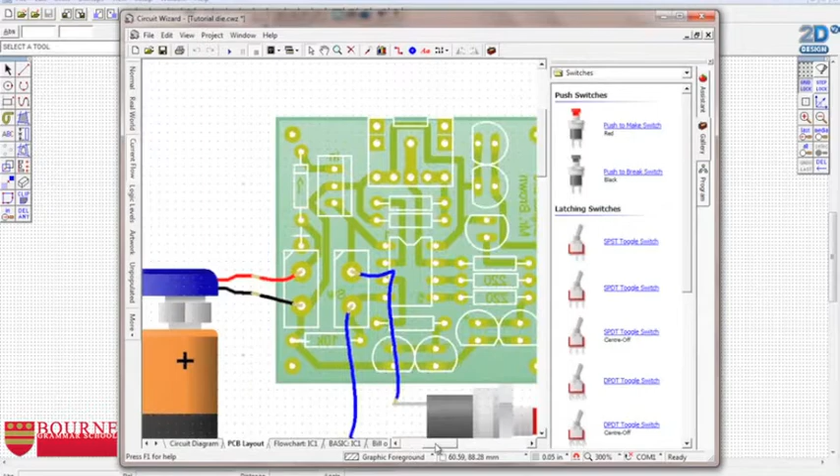Now, the PCB you've been working on in the tutorial looks a whole lot like this one just here. There it is. I'll show you how to do it for this one, and then I'll look at the actual one that I've created. That is the one you're actually building, which is very similar, but just fractionally different.

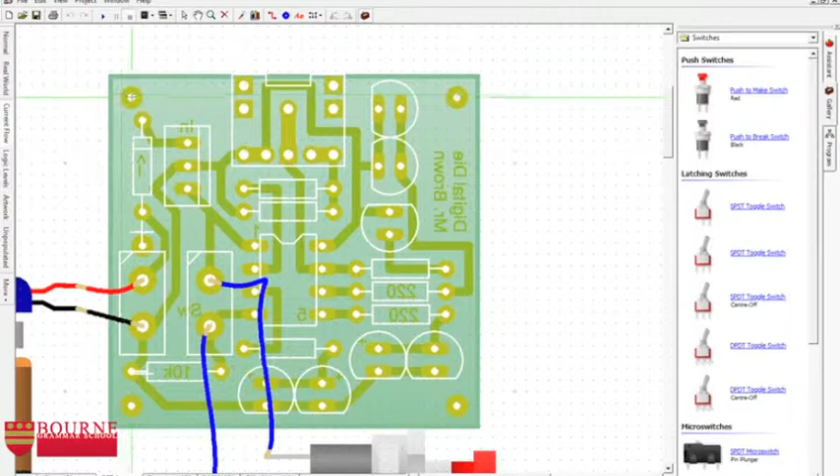There isn't a very good measuring tool built into Circuit Wizard, but what you can do is go Project, then PCB Components and Circuit Board, and you can draw a circuit board. Make sure you turn the grid lock back on, snap to grid. You can draw a shape from the center of that particular piece of the board down to the center of this pad down here. This isn't actually snapping on very well. It should snap on perfectly, but that's approximately in the same position for each one of these pads, so it'll still work effectively the same.

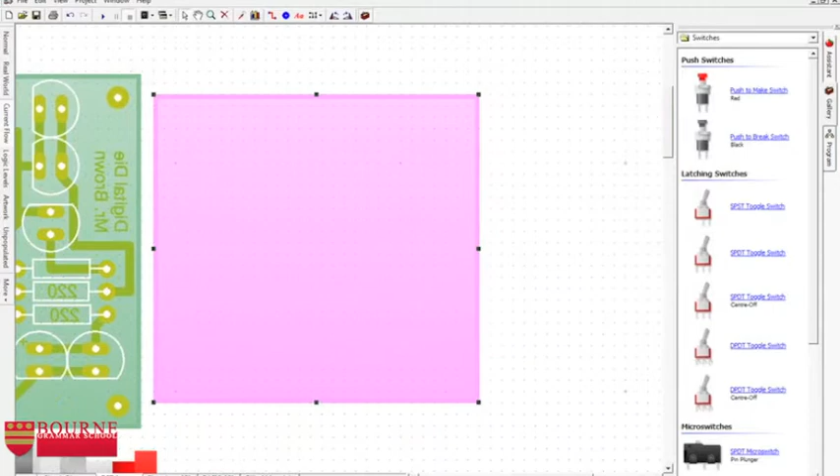And what I can then do is pick that up, slide that off my PCB, and hover the mouse over it. That tells me that my pads that I want to solder everything together with are 36 and approximately 3/4. We can round that up, so we'll call that 37. So it's 37mm wide and about 34mm tall from center to center. So if I know that, and I know that when I manufacture that PCB, that's exactly how big it's going to be, if I match those exact dimensions in TechSoft 2D, then I'll end up with a case which will click together perfectly.

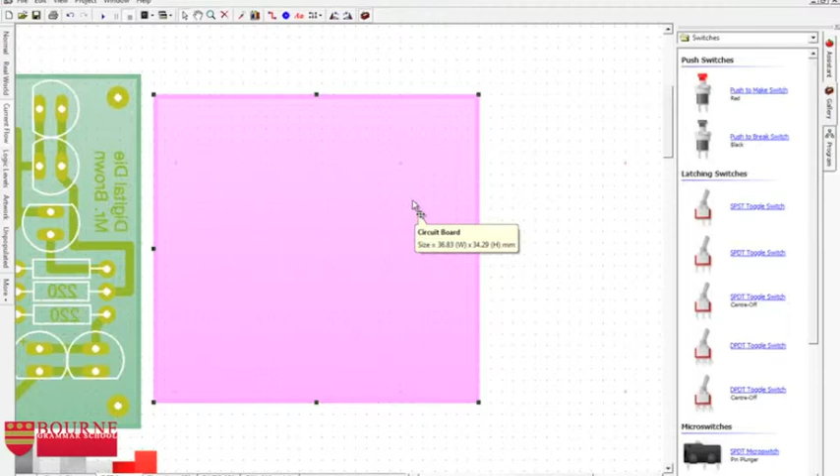Alright, let's apply the exact same principle now to the circuit that you're actually working on, that you've created and soldered together. You haven't got this circuit, so you just have to watch me do it, okay? But your one is, here it is. Just wait for it to open up. Here it comes, and obviously we mass produce ours for you as well.

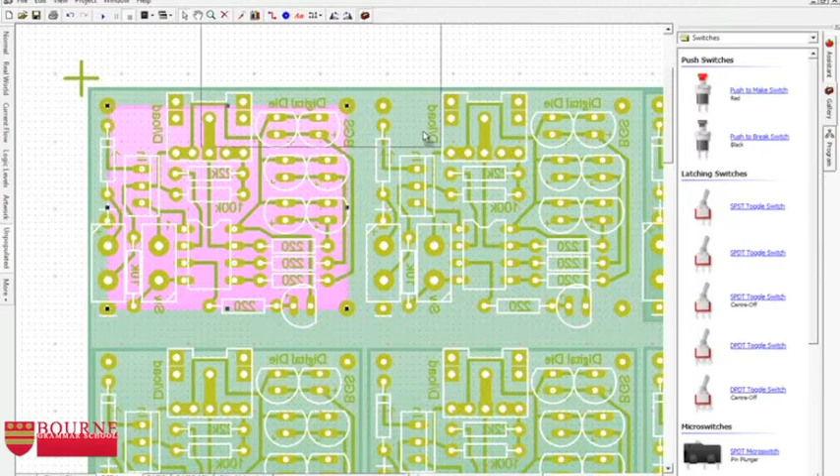Back to unpopulated view. Project circuit board from here down to, oops, down to here. Plop. There we go. Getting that out of the way. Hover the mouse over it. 36 by 30. Okay, so 36 by 30. That's not too bad.

Think. Yeah, 36 by 30. Okay, so that's the size we're going to need to work with. 36 by 30. Let's make a note of that somewhere. 36 wide by 30 high. And we'll leave that there. Just shrink that down a little bit so it doesn't get in the way.

Okay, so what do we do with this information? Well, what we do is we start to draw, before we do anything else, the circles where the actual PCBs go mount to the board. And you can do that by clicking and holding the mouse button down on here, look, and going to this draw circle with a given center and radius tool.

We know, or at least I know, that we're going to use M3 bolts to hold this together. An M3 bolt is a bolt which is 3mm in diameter. If it's going to be 3mm in diameter, it's going to need a 1.5mm radius, half that amount, to physically pass the bolt through. And I can put that first click anywhere I like, so I'm going to put that one just there.

For my next click, what I need to do though is to make sure, because we're 36 from centre to centre, that I move across by 36 millimeters exactly. I can make sure it's exactly 36 millimeters by using the relative dimension tool just here. You see this one? If you watch that, it'll tell you. If I move that straight over there, it says 0, 0. If I move it 1 millimeter to the right, it tells me I've moved 1 millimeter to the right.

So as long as I change that number to 36, and I don't let the other number, the Y component, the vertical bit, change, I know that that is now exactly 36 millimeters away. I also know that my board is 30 tall, so I can now drop down 30 millimeters exactly, making sure I don't let the other number change this time. And then finally I can slide back 36 again and click one more time. So this is basically where my PCB is going to have to mount to my case. So as long as I leave those there and never move these, then I know that whatever I design will physically fit.

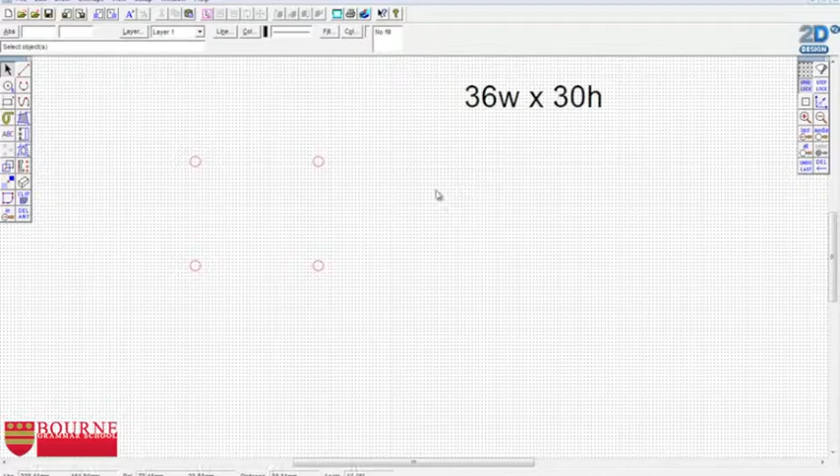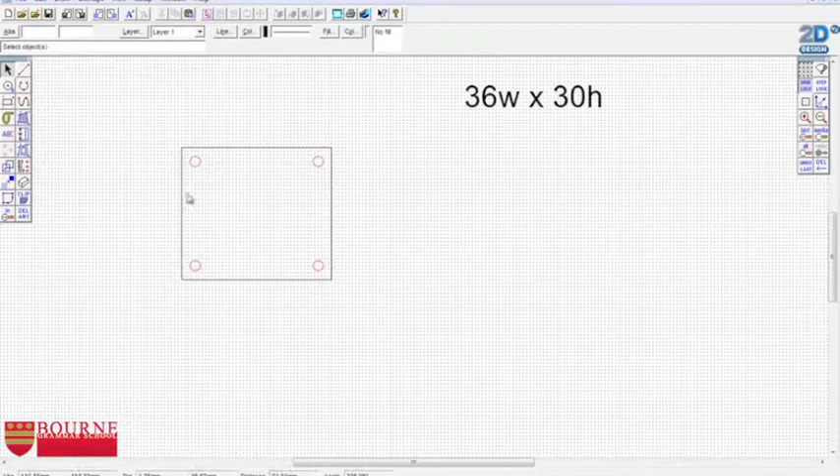Okay, what do I need to do next? Well, at the moment, I've got this huge, big 30 centimetre tall and 60 centimetre wide sheet of plastic with 4 holes in it. So I need to actually cut out the physical die shape as well. So to do that, I'm going to go for a sort of square shape, because a die is a square, and I'm going to go something like that. I reckon that looks about right. Forgot to click. There we are. So I've drawn that. So this is going to be the outline of my die. Again, I'll change that to red so that gets cut out for me as well.

This shape's quite a harsh shape at the moment when it looks like this. So I'm going to round these corners off, and I do that with the filleted arc tool. If you click and hold the mouse on here, slide over to the end where it says filleted arc. You can then choose what radius of arc you want. I'm going to use 3 millimeters. Again, experiment. Try different things for yourself. See how you get on. I'm going to use 3 millimeters though. I just click off the edge of each of the 2 sides like this. Look, that rounds those edges off for me nicely.

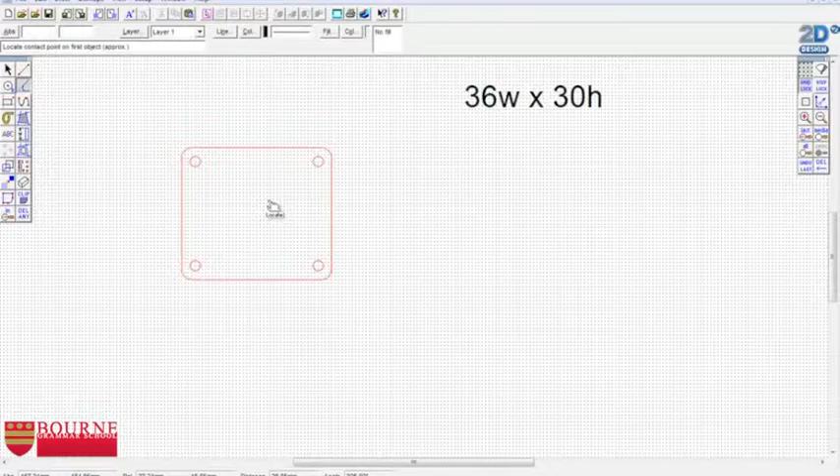So I'm not going to end up with something that's going to rip people's pockets up if they try and keep it in their pockets. Okay, so that's that. So I've got the overall sort of shape. I've said that I'm going to have the PCB mounted to a bottom piece of this, and another piece stuck up on top of it. So I actually need to have a couple of these.

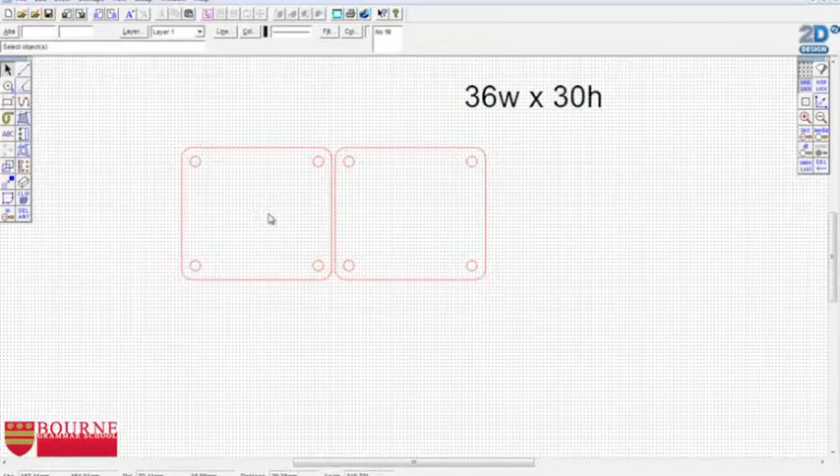So I might as well select all of that and then copy it, edit, copy, and then paste it like so. And I'll pop that alongside my first one, like this. So I've got my front and I've got my back. The next thing I'll need to do is to detail the back. I think on the back piece I'll treat this as the back. Done with that now, get rid of you. All I need on the back is maybe just my name, so I know it's my one.

So I'm going to grab the text tool, which is here, and click, and I'll write my name, like so. And I can go into settings if I want as well. I quite like to change the font. I'm feeling pretty good about Harrington. That's quite cheesy as well. Anyway, fonts aren't why we're here. I'm going to use this one here, Segoe Print. I quite like that. I'll have that regular, I think.

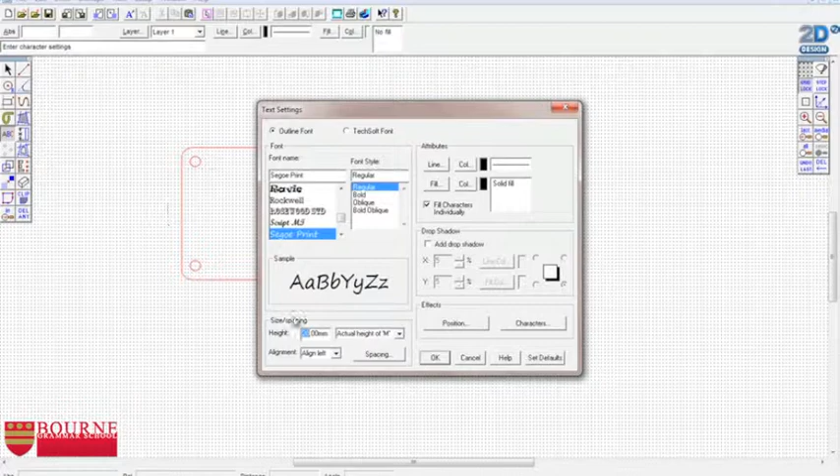And I'm going to make sure the height of the text, I don't want the height of the letter M to be 20 millimeters because that's going to be huge. I'm going to change it to about 4 millimeters instead for the height of my letters. Click on OK, click on OK. That looks pretty good, and I'll stick that in approximately the middle. There we go, so I know whose it is. I'm going to leave that black as well so that the laser cutter just etches that in there for me. It doesn't physically chop holes in my board.

Okay, let's look at the other side now. This is the one that requires a bit more work. On here, I need to have space for 7 LEDs and also for the button as well to physically be able to push to roll the die. I did some measuring before I started recording this tutorial, and I know that to get a switch through this hole, I need to have a 7 millimeter diameter hole. So I measured the switch with a caliper.

So it needs to be 7 millimeters, and also for an LED, they're 5 millimeter LEDs that we use, but the LED sits inside a little plastic clip, which measures about 2 millimeters in total of its plastic. So I actually need a 7 millimeter hole as well for my LEDs to make sure they're going to fit in place and not drop out. So I need some 7 millimeter circles. I also want to be quite presentable. I'd like this to be in the center. I don't really want stuff all hanging off to one side, so it looks a bit amateurish.

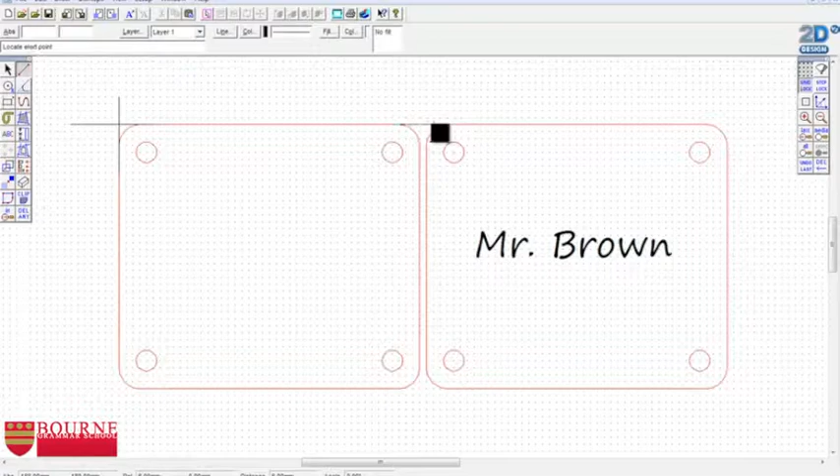So I'm just going to zoom in on this surface I've got here. There you go, you can see that nicely. And how do I find the centre? Well, I'm going to do that by drawing some construction lines. Construction lines are just temporary lines that you put on a piece of work that you're going to delete later. So first I need to be able to find the corners of my shape. So I'm sticking some of these in. I'm not measuring how long these are because they're coming out later. It's just purely to give me the edges of my shape.

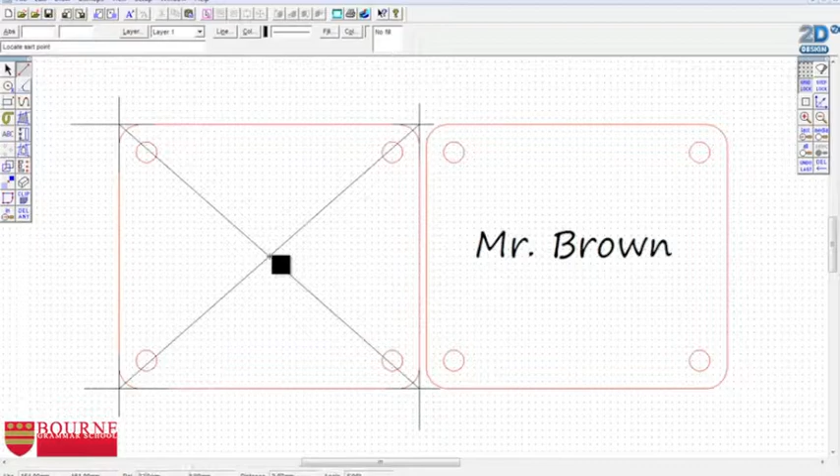Like that. If I know exactly where the corners are, then I can draw a line now from that intersection there to that one there, and that one there to that one there. So I know categorically that this here is the centre of this shape. And what I'm also going to do is draw a line up from there, down from there, and also left. Oh, missed.

You know what? I'm just going to delete that one. And, delete. Gone. Yeah, to the left and to the right as well. Lovely job. Okay, what should we do first? Let's do the LEDs first of all. So I'm going to click on here.

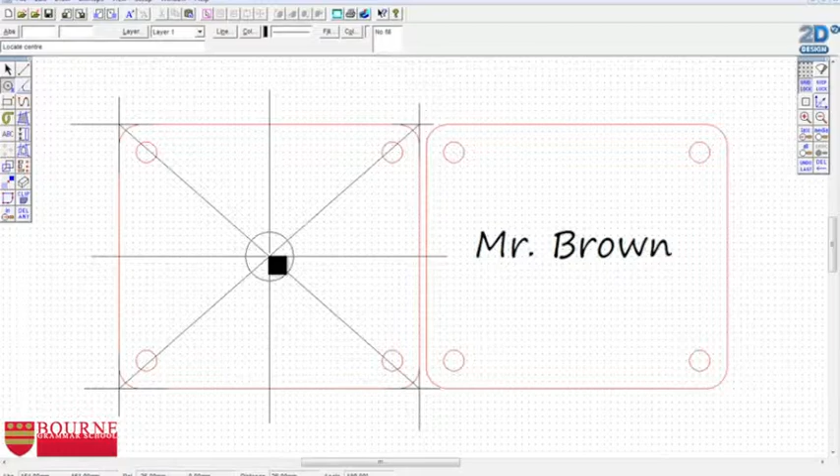If I said I need a 7mm diameter, it means I need a 3.5mm radius. And I'm going to put my first die LED, the one that's going to be the number 1, right dead center like this. Okay. And what I'm then going to do is slide over to the right by a bit. Now I'm using my REL just here so I can make sure I place the one to the left an even distance away. Okay, I'm going to place that around about, I know that looks pretty good, doesn't it?

That's 12mm, so let's use that. I'm going to place it 12mm. Now maybe 10mm. Yeah, 10mm away. Okay. I'm going to move over to the left 10mm, then move over to the left another 10mm, so it now says -20 on the REL thing. Yeah, I'm going to click there.

I'm then going to move up a little bit because I need to be able to think about when I'm making a number 6. I'm going to move up by, what looks good, I'm going to move up by 10mm I think. I'm going to move down by 20, another click, across by 20, and then up by 20. Like that. So I know that all these are perfectly lined up and they're perfectly central on my diagram.

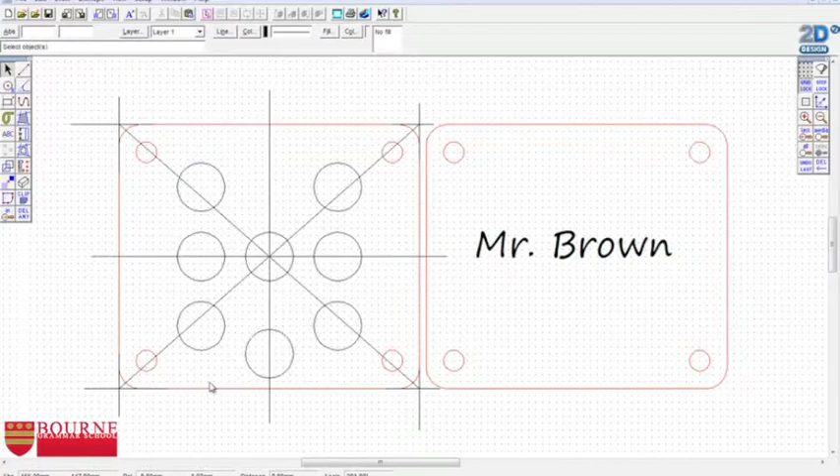I need one more of these holes as well to actually put my button through so I can actually spin the die. I'm going to stick that just sort of towards down the bottom here, I think, a little bit like this. That looks good. And again, that's central. What I probably also want is maybe a little bit of text, just says digital dice or something like that on the top. So I'm going to use my text tool, click anywhere really up there, digital die.

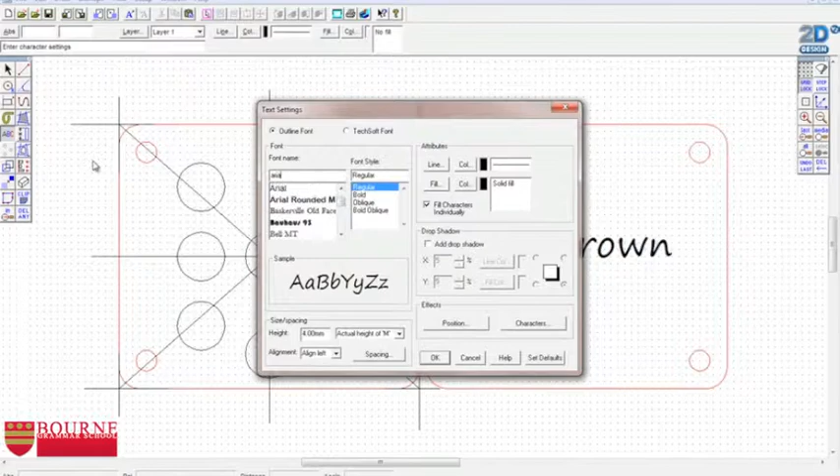What font do we feel like this time? I'm not using that anymore. It's a bit childish actually. I'm going to go back to good old-fashioned Arial. Can't go wrong with Arial. Probably my favourite font, I think. And I'll use regular. And I'm going to make sure 4mm tall letters sounds pretty good. Looking nice. And again, I'm going to stand that slap bang in the middle. This blob here is as close to that line as I think it's going to get, so that's pretty central.

I have to resize a little bit. When you resize, so let me just stop that and go back to it. When you resize some stuff in 2D, a lot of people just grab a corner, left click, and then start resizing. But the problem with doing that is, as you can see from what I've just done here, is you lose the proportions of your text. So suddenly it looks a bit rubbish, looks like something Year 6 has done. So I'm just going to do Control Z, I'm going to undo.

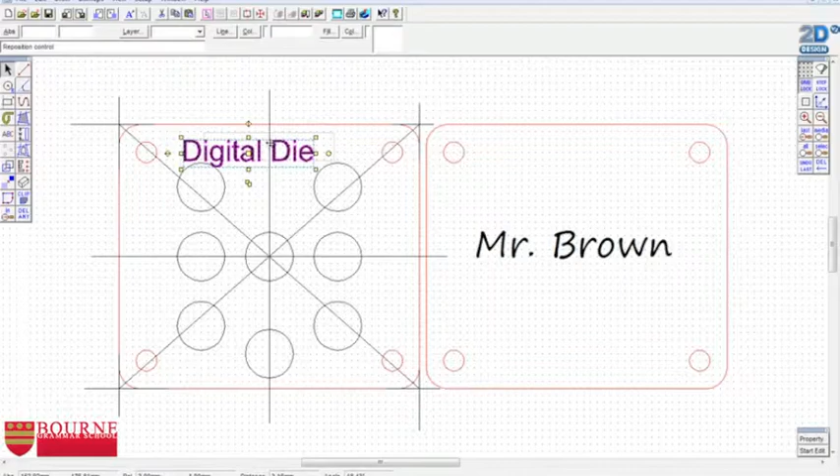When you do resize, rather than left clicking, right click instead. And that way, look, you see as I get bigger and smaller, it's holding the proportions of that piece of text. So that way it's always going to look nice and sort of elegant when it's done. So I'm going to stick that there, like so. Again, that's central, so I'm happy with that.

And what I can now do is go through one by one and using the delete key, I can delete all my construction lines. I don't want those left in there, making it to the laser cutter, otherwise it looks all scruffy. There we are. Okay, looking good. Also now I need to get these and turn these all red, so I'm just going to draw a big box around the whole lot. Go colour, go red, those will all be now cut through.

And pretty much actually that is the design for the digital die. You could now freestyle yours a little bit if you wanted to. You could put some little pictures down the side, little lightning flashes or little pictures of dice from the internet you can stick in there as well.

Do remember though, the more black you put on here, the longer it's going to take to cut that out. One more thing I've just remembered as well, I'm just going to click on this text for a second. You can't really see it at the moment, but every single one of these letters, as well as being black, has also got a black line drawn around it in here. You can't even see it, but it is there. If you laser cut that right now, it'd end up very difficult to read, because after etching the letters into it, it would then draw this line around the outside.

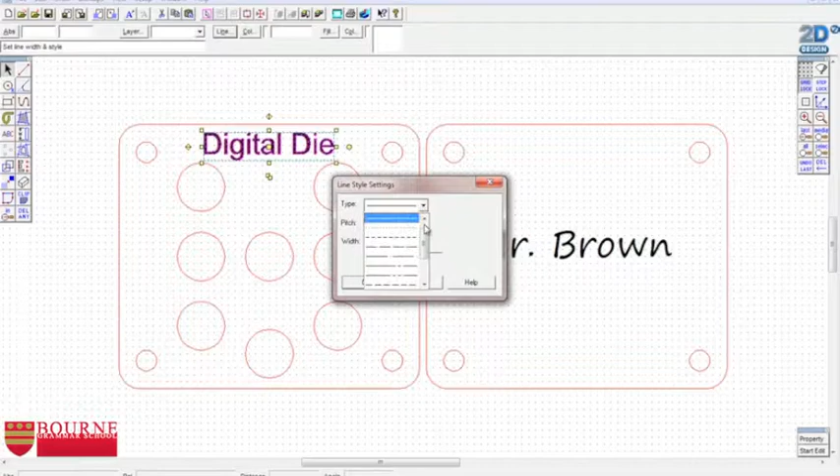So I'm just going to click on the word line, just here. There you go, there's that line. Look. I'm going to take that line, I'm going to make it invisible, and I'm going to click on OK. Cosmetically, it doesn't look any different, but believe me, when you actually come to laser cut it, it will look different. I'm also going to do that over here actually now I think about it, and set that line as well to invisible, to do away with that being a problem as well.

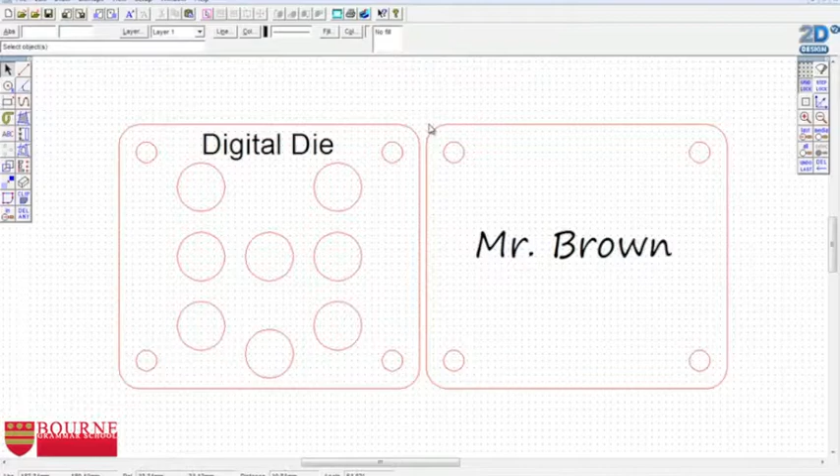Okay, so there you have it. That is the digital die case. The last thing I'm going to do is this. Let's just think for a second about it. Imagine for a moment that what you're looking at here was a sheet of wood, or a sheet of acrylic. Okay, there it is. There's an imaginary sheet of acrylic. A lot of people, when they send stuff to the laser cutter, will email in and they'll say, right, here is my design. Can you laser cut that, please?

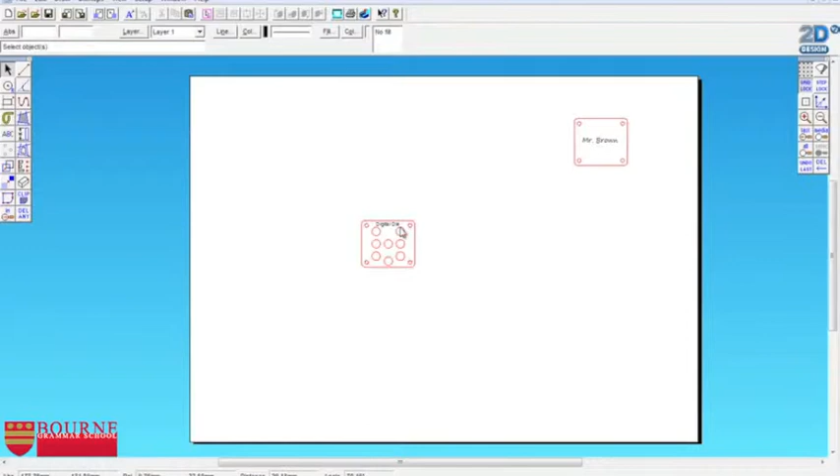What then happens is the laser cutter will come down here. It'll chop that bit, and it will then come up here, and it will chop that bit. And what we're left with is a bit of wood where we can use this area from here to here. We could use that again, and we could use this area from here to here, and we could probably use this bit as well. But it's kind of divided it all up quite a bit.

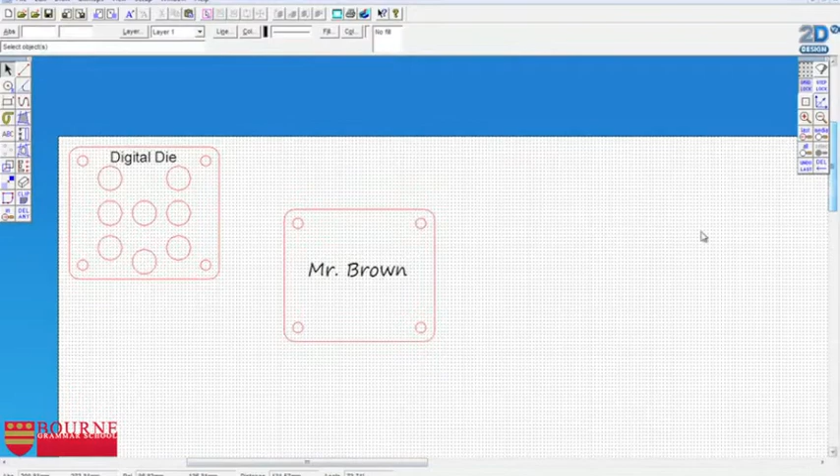It'd be much more convenient, much better sustainability-wise, if instead we took the finished product like this, and we popped it up here like that. We've got things as close together as we physically can. Okay, if we pack them together really, really tight, then it saves the poor old technician or the teacher having to do it for you. And it means we also waste less material, which is better for the environment.

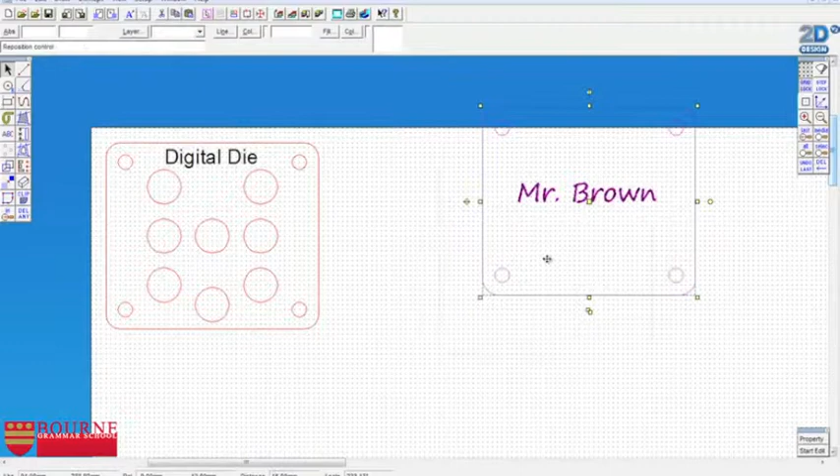To make it easier to move things around, you can actually also group stuff together. At the moment, if I click on here, I just get this circle. If I actually click on here, highlight the whole lot, and then go Edit and Group, the next time I come over here, I'm now picking up the whole thing all at once. Much, much more convenient. And I'm going to do that here as well. The keyboard shortcut is Control-G. I want to get used to doing that.

So what I'm actually going to do to make this as tight together as I possibly can is put these things like this, so that they're touching. When they're cut out, they'll still come off as two separate things, but at least when I'm laser cutting, I know that the only tiny bit of material I'm wasting now is the curve on this corner, curve here, little curve here, little curve here, little curve here, little curve here.

And if you wanted to, you could even take those curvy bits once they were cut off and stick them to the bottom of your digital die, so it's got its own little stand that it stands on. When it's finished, it's quite nice. It looks pretty as well. So you could even do that if you wanted to. How about that? So there you go. That is how you design the case for the digital die.